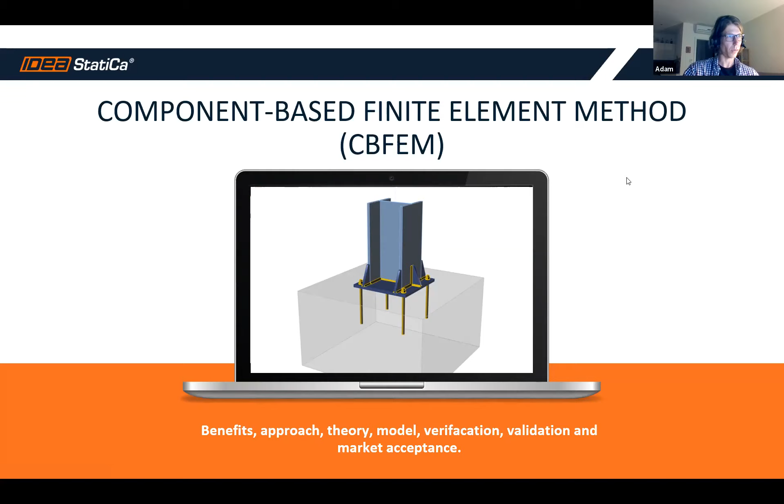What is CBFEM? This is a very unique, innovative technology, a component-based finite element method. That's the full name of that. And what it does, it allows a design and code check of steel connections according to codes and national standards. And the advantage of this technology is that it can do any topology, any loading, and it can do it pretty fast. And it supports various codes at the same time.

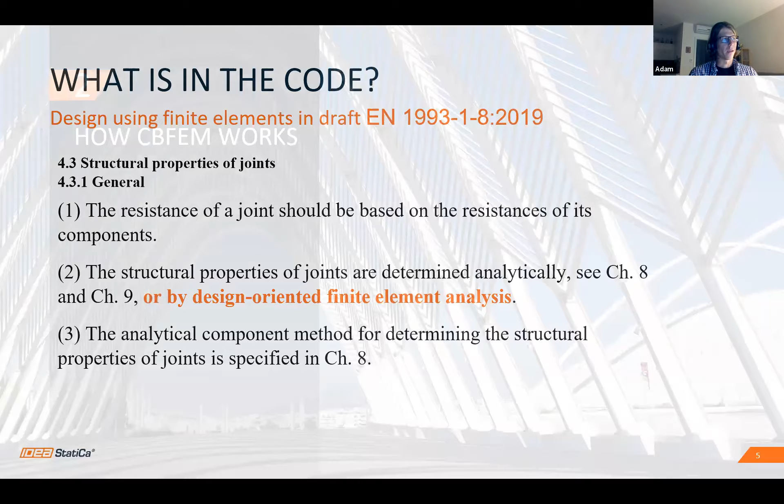Now, how does it work? What's behind this? This is something a bit different from the standard finite element analysis softwares, like ANSYS or Abaqus. Those programs are pretty good in simulating the real behavior, like deformation behavior of connections or steel structures. But for code checking, this is not really of any use, because you have to take into account all these code-defined safety margins and safety factors and so on. So that's why this is a bit different approach. It uses the design-oriented finite element analysis, which takes into account all the code requirements, and this is included in the method.

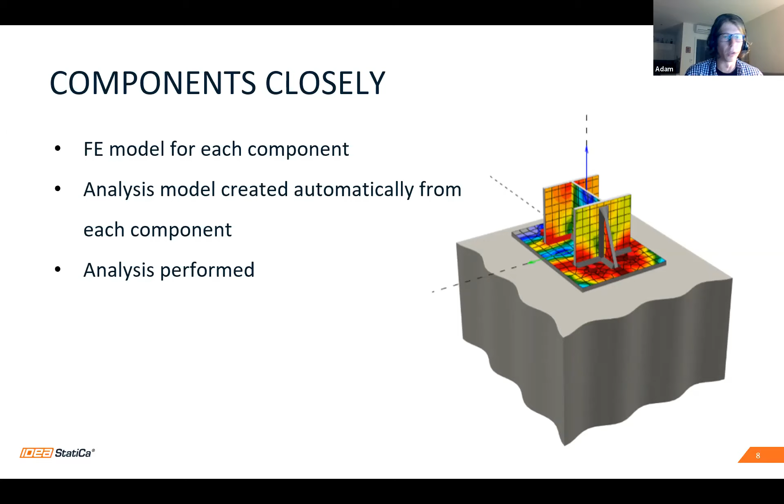Now, it works, as I said, based on finite elements. So imagine having, for example, anchoring of a column. This is all separated into finite element components, and there is the analysis model created automatically by the software, and the analysis is performed. You will see this all live, I'll be showing you in a couple of minutes.

How is the model of, for example, an anchoring or a steel joint created? There you have plates, such as end plate, fin plate, or whatever — that's a 2D shell element. You've got the 2D finite elements. Then members such as columns and beams, for example the I section or whatever, those are shell elements connected by butt welds.

Then you've got bolts and anchors. Those are kind of non-linear springs. And the weld elements are just linear special finite elements with constraints connecting the shells of the plates.

The steel material within the model is described as plastic nonlinear in way of the material, not in the geometry, but partly we also cover this nonlinear behavior of thin-walled or closed cross sections and so on. So this is partly also covered. And the material model is, as I said, design oriented, taking into account all the safety factors.

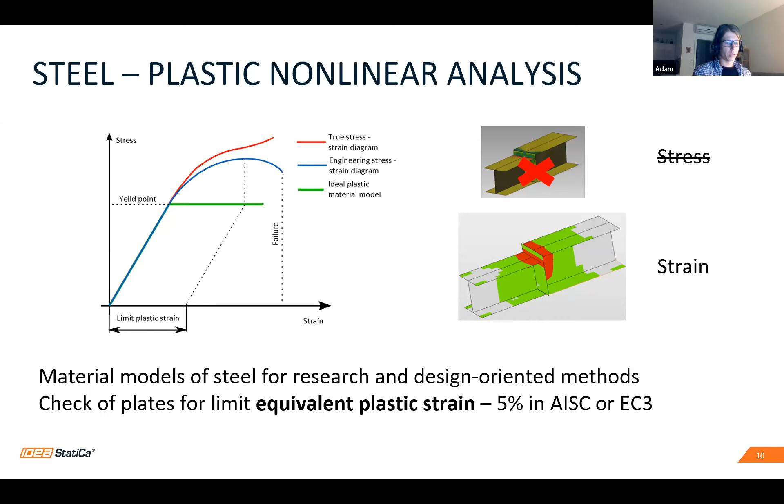Now about the welds, they have their own finite elements. They respect the geometry, of course, also stiffness and ductility of the real weld. And what's more, one of the highlights of the method and the software is that we offer redistribution of the stress along the weld.

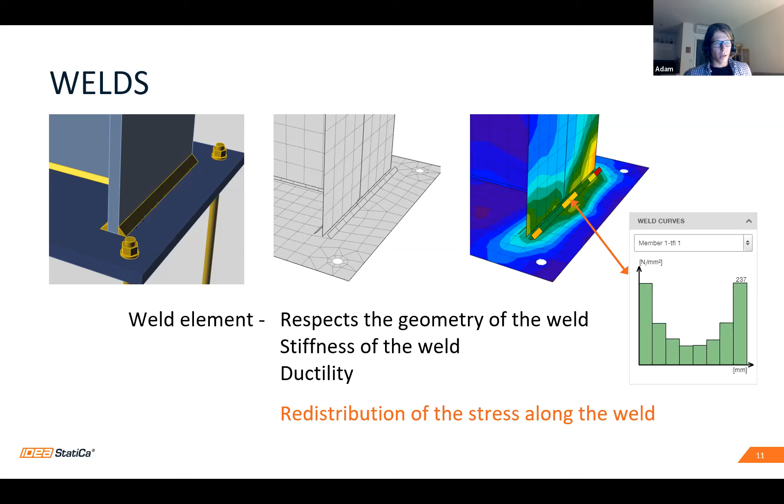What does it mean? That was made about 2 years ago, an upgrade of, I think, version 8 of IDEA StatiCa. We were thinking about how to improve, how to match better the real behavior of welds, because if you assume elastic or just plastic behavior of a weld, then the real capacity is much higher. So we were thinking how to boost that, and came up with this plastic redistribution.

That basically means that when you have a weld — for example, there you have an image of an I section on a base plate, and there's a fillet weld along one of the flanges — now you start loading and increasing the load of a moment, started at 50 kilonewton meters in this case. What's happening is that in these finite elements, there are 9 used to model the weld, and you're getting the high stresses at the edges of the weld.

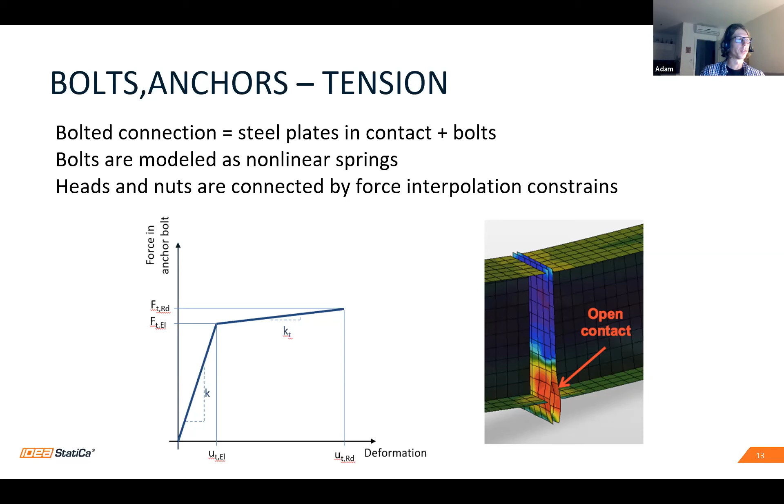There's elastoplastic behavior of the bolts and anchors, of course. And regarding shear, again that's nonlinear spring contacts around the hole, around the opening for the bolts. Those work only on the side where the bolts press or apply tension on the plate opening.

And this has been patented. That was a big success because we've also got a US patent for this, and that pretty much covers the solution and the whole method.

Another part of the model is the concrete block. That's of course the compression-only element, works as a Winkler-Pasternak subsoil, and that represents, basically like small springs, the deformation of the concrete block on which lies the base plate.

The tension is of course carried by the anchor bolts. Then you've got the shear force, which is either transferred by shear of anchors, or by bending the anchors, or by friction along the surface between the base plate and the concrete. Also, we can model a shear lug or shear key.

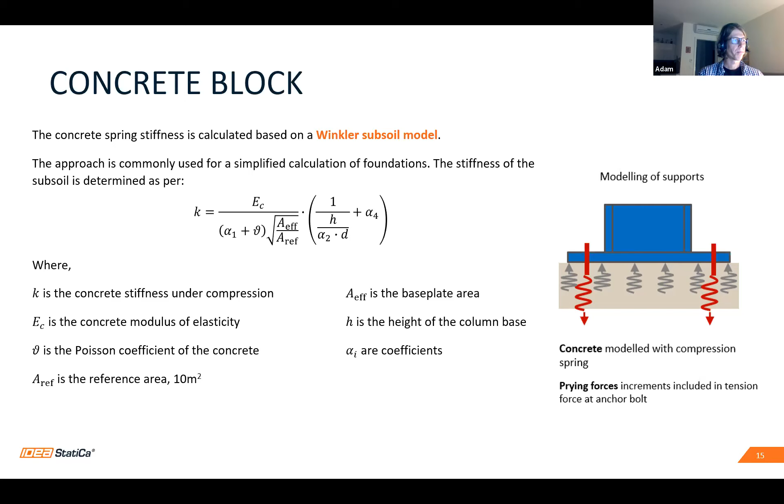Okay, so those are all the parts. And with those, you assemble the analysis model. This is, as I mentioned, created or generated automatically by the software or by the method. And the model is meshed - there's of course a meshing engine inside.

This is also a bit different from probably the software that you know. It's special in that there's no intersection or match needed between each element. You're probably used to finite elements where you have to match all the nodes and edges when connecting plates or separate elements, right? This doesn't need to happen here within the component-based finite element method.

So this is very special. Instead of using that common method, we use a kind of interpolation constraints to match or connect those parts together to make it work. You can see it here in detail. This would probably not work in, I don't know, Midas, for example, or other common finite element softwares.

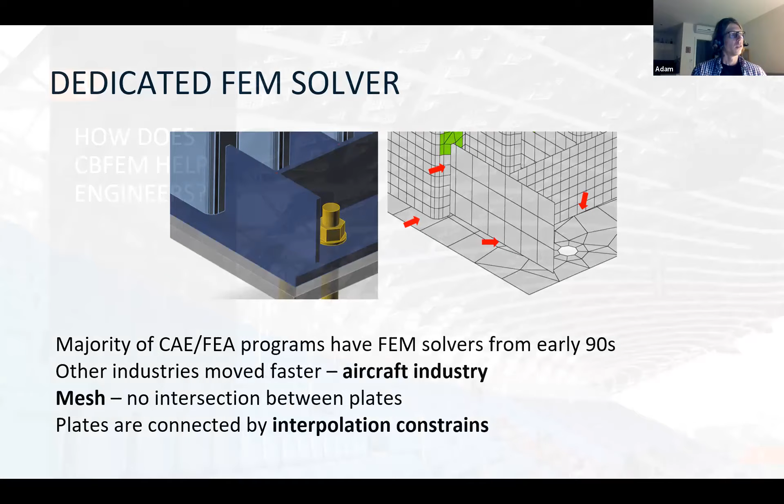Okay, so that's a bit about what's behind or inside the CBFEM. How can it help our engineering society? The method, as it is, covers a couple of softwares today. It was originally developed for IDEA StatiCa software, but it's already been adopted for some years by Hilti, for example, for their advanced Profis software for designing and code-checking their anchoring.

So they are using this technology there. Also, Advance Design Connection, that's actually just a twin of IDEA StatiCa under the Graitec company. And also voestalpine Profilform - they have their special software for designing and code-checking their special thin-walled constructions. They use it for their own production and designing.

And why is it so unique? If I would sum this up, what I was talking about, it's a general and robust method based on finite elements that allows design of steel connections and anchoring without any limits at all - well, almost at all, regarding topology, design, and loading.

Of course, the first question the engineer would ask himself regarding such an interesting new tool: is it safe? Can I use it? Is it verified? Can I trust it? Because it's something completely new, something that hasn't existed before and nobody else uses. Of course, the answer is yes, because it was very well verified and validated, and it's been a couple of years already - I think it's 8 years since we started with this.

The verification went on in, let's say, 3 or 4 steps. First, the technology and software were developed and created, and then the first step was to verify all the standard connections that are very well described and analyzed in design guides and codes, those repeating ones.

That's what we did with 100% match. Then we carried on, and the second trial was to match complex models created in ANSYS. You spend days or weeks creating those research models, and compare them with this light and easy to use method within IDEA StatiCa. Again, very good match. So we passed this trial as well.

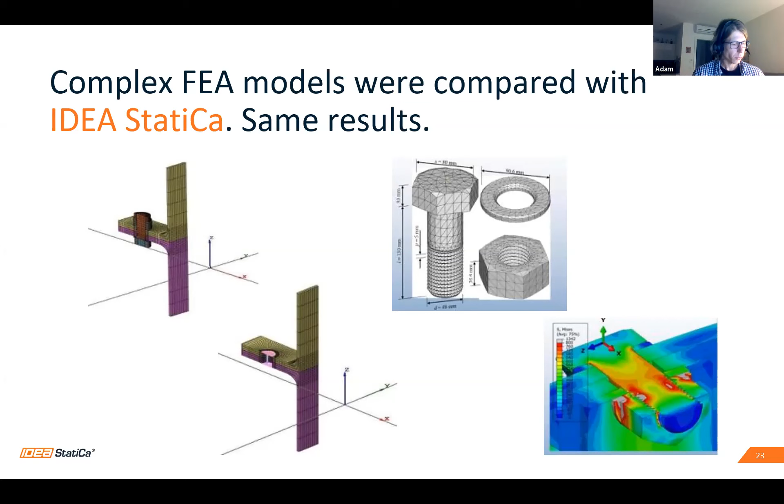This book is available as well if you're interested. It's all described and summarized there. This method is not a black box. It's not the way that we provide the software and say, use this because it's verified and just believe it. It's pretty well covered. There are 2 websites for that.

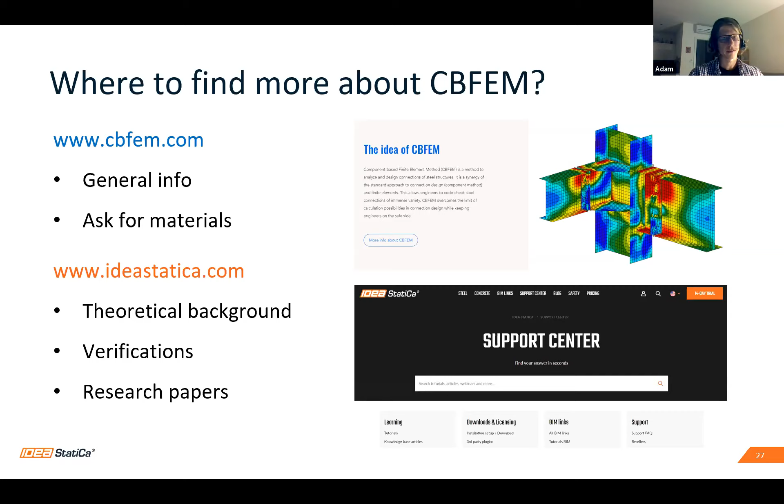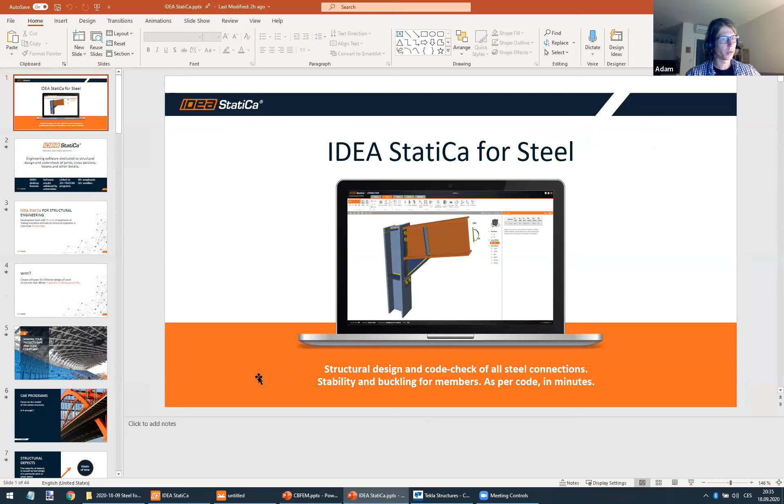So that was about the first part of the method, and now let me move on to the second presentation about the software itself. It's the IDEA StatiCa software. We've got applications or modules for steel and for concrete. I'm not going to talk about concrete today, just about steel. So let's go.

What is it? It's engineering software for structural engineers, for design and code check of joints, cross sections, connections, and details. As I said, more than 4,000 licenses worldwide, meaning a couple of thousand users. The software is validated. We have developed BIM links to more than 20 other software, so you can import data. I'll show you this as well.

We are based in Czech Republic. It's let's say a family business. We've got over 40 people, and a network of resellers worldwide that spread the word. The development is based on 30 years of experience, as I mentioned. The core of the team started 30 years ago, developing finite elements in various applications. Now we are present in more than 70 countries.

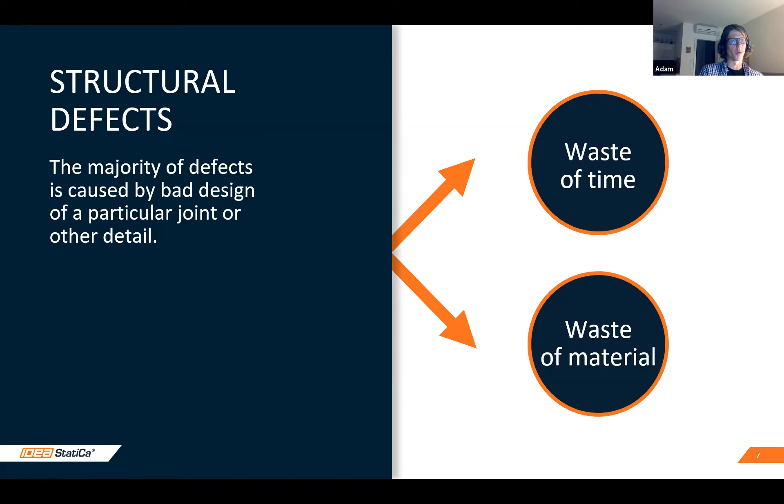If you would analyze defects on steel structures, or even collapses and so on, the fact is that they usually happen in the details, like connections or joints, not in the beams or columns. So that's a pretty interesting issue. And of course, any problem is a waste of time and waste of material and so on. So that's also the motivation why to do this, and why we focus on connections and particular members of steel structures.

And so IDEA StatiCa is the first and still the only one to provide such a tool with this capacity inside and this, let's say, professionalism of the global industry players with this unique method. Now the challenge, of course, always number one, is to be on the safe side, which means comply with design codes: US, Eurocode, Canadian. We support now 8 national standards. We've also got Chinese, Hong Kong, Indian, and a couple more.

And the thing is, when you're a structural engineer you have to code check the whole structure, meaning all the members, the global model, and all the connections and details. Question is, have you really done all of that? 100%. This is the easy answer regarding the standard or the easy connections. If you imagine, let's say, a simple steel hall, standard connections are not a problem. That's like an everyday meal, right?

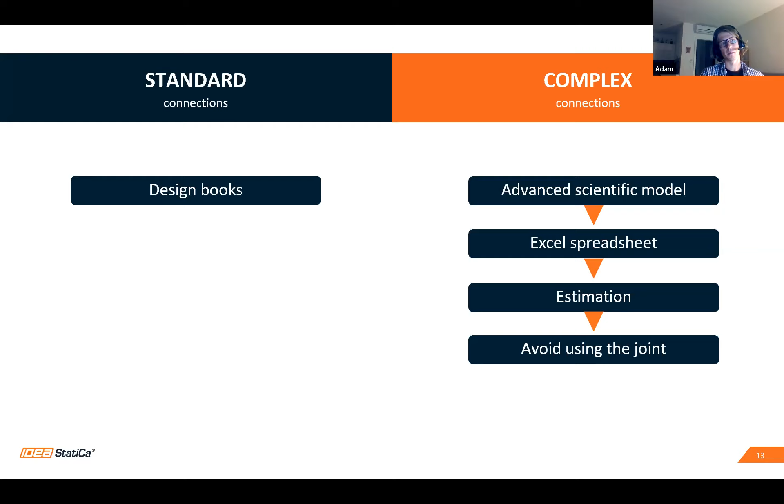So they had to somehow take those outputs and translate or transform them into the forces and the values that you need for code checking. For that, you have to prepare a special Excel sheet that matches just these special details and project. Then sometimes estimate, because that was pretty hard work. And what they confessed, which was very interesting, is that sometimes they even avoided using the joint and had to redesign the detail, spending a couple of weeks of work, right?

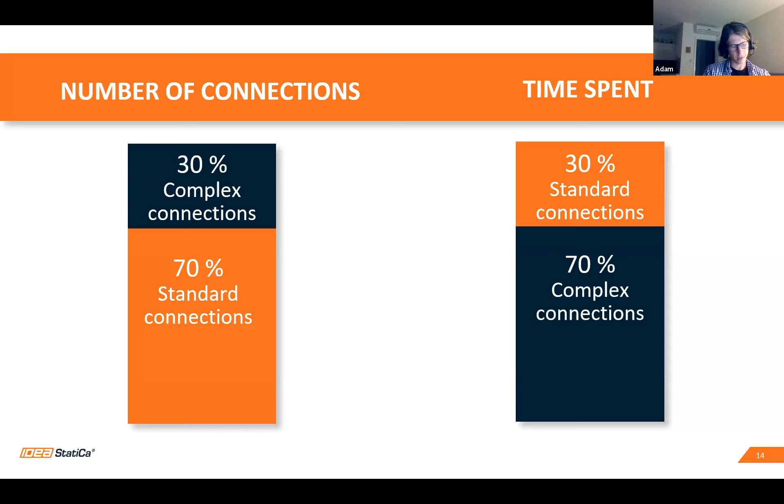And then this is another analysis that we've done. If you take a look at some kind of standard steel structure, the majority of connections are standard, just end plates, fin plates, and so on, and a small number are complex connections. But if you look at it from the side of time consumption, you spend 70% of the time on your project designing and code-checking these complex ones. The standard ones are pretty easy and pretty quick to do, right?

And that's also another motivation why to create the software. We bring a solution for this. We bring a tool to do the job the easy way and pretty fast, actually in minutes or hours, including optimizing and things.

And then we tried to reproduce this with IDEA StatiCa. We found out that in IDEA StatiCa, to model this, you can see it in the webinar, it takes me about 20 minutes or even less to do this from scratch. Of course, I was prepared for that, so I did it the very nice way. But anyway, it's just a simple job to do. And then we focused on optimization. Would it be possible to make the original design better, to improve it?

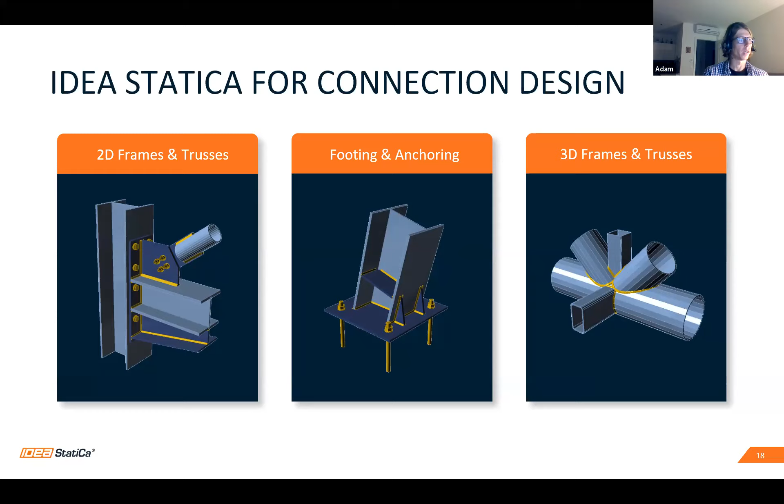And what types of analysis we provide? There's the stress strain analysis, that's the standard one. The code check means you model a joint or connection, analyze, it shows you results and tells you whether you pass the checks or not. That's like the overall check.

Then we also provide buckling analysis that shows you the buckling shapes and critical buckling factors of the connections. Also, you can calculate stiffness of your connection that you can apply back into your global model to somehow improve the efficiency or to match better the behavior of the whole structure.

Then there's capacity design that is used for seismic, and design joint resistance. That's like extra analysis. It shows you how much more capacity you have in your joint when it's designed this way and when you apply this load that you have. So it tells you, I don't know, like 30% more.

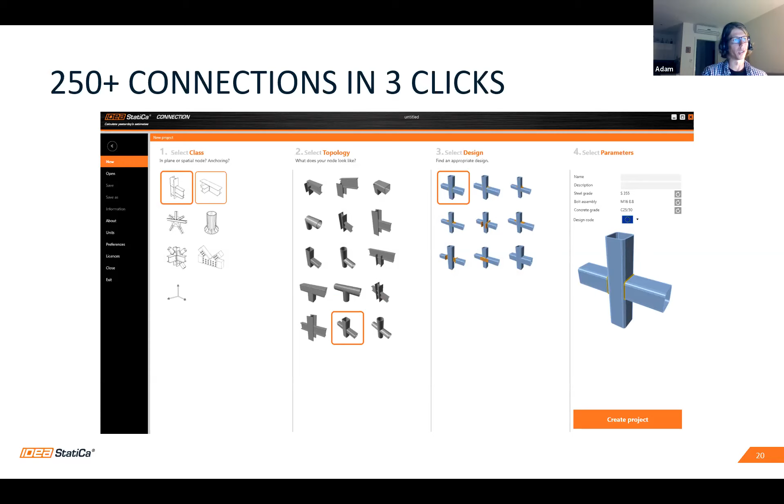Okay, now this software works that there are starting templates, so you don't have to start from scratch with a blank screen, but you can choose some basic shapes, basic connections, and just very quickly edit and modify this and get the results done really in minutes, in a few clicks.

So the workflow: you take any template or a blank screen, you edit it, or just step by step add more members, plates, and items to achieve any topology, any loading in a couple of minutes. There is a nice testimonial from Matthew Pearce, Mott MacDonald, another customer of ours. They are happy using this tool for their complex joints.

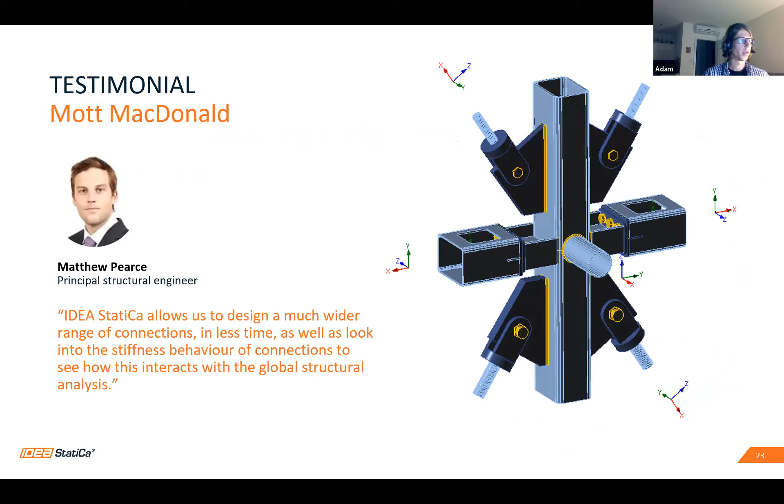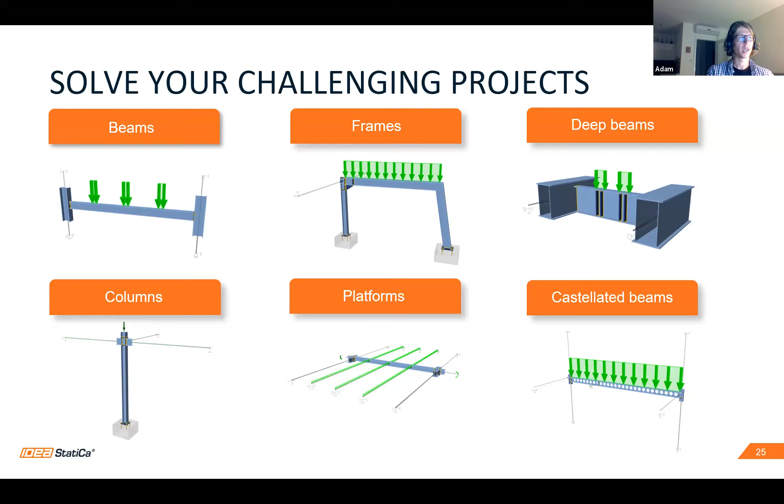What else we have? There was the IDEA StatiCa Connection software, right? Next to this, there's IDEA StatiCa Member. It's quite a new application, and it was developed and is dedicated to solve all kinds of buckling of members of the structural parts. So you've got beams, frames, platforms, columns, whatever, and there you get all kinds of buckling, like torsional, lateral, warping, whatever.

This is treated by a couple of softwares already, but what more we offer is that, of course, there's a stress strain analysis if you model such a beam, for example. A buckling analysis, also nothing that special. But then the third step is that we provide the full nonlinear analysis that includes the imperfections, geometrical nonlinearity, and all the effects of buckling. All this is processed and analyzed, and at the end the output tells you, even considering all of this, whether you have passed the checks or not.

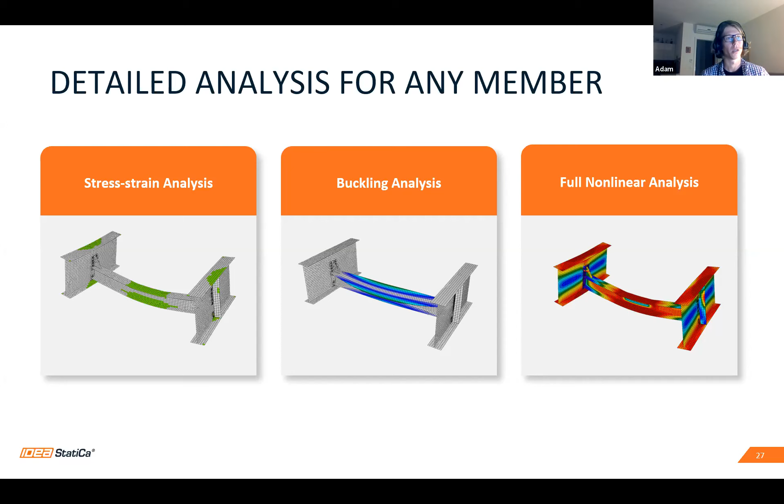So, as far as I know, none of the finite element softwares for structural engineering offers this. And of course, this is again free in terms of topology and loading. Those are some examples on the pictures that can be done. Also, it takes into account the stiffness of the connections that you model, to match the real behavior as best as it can.

Other workflows, this is regarding the BIM links. We are linked to a couple of finite element analysis software. How it works: when you install IDEA StatiCa on your computer, it adds a command to your, I don't know, SAP2000, ETABS. That means you analyze the structure there, just click the command, select a structure node and the connected members, and it transfers the data into the IDEA StatiCa Connection application.

What you have to do is add the design, which is of course not included in the structural software. What you read from there is the topology, the cross sections, and the main thing, all the loadings.

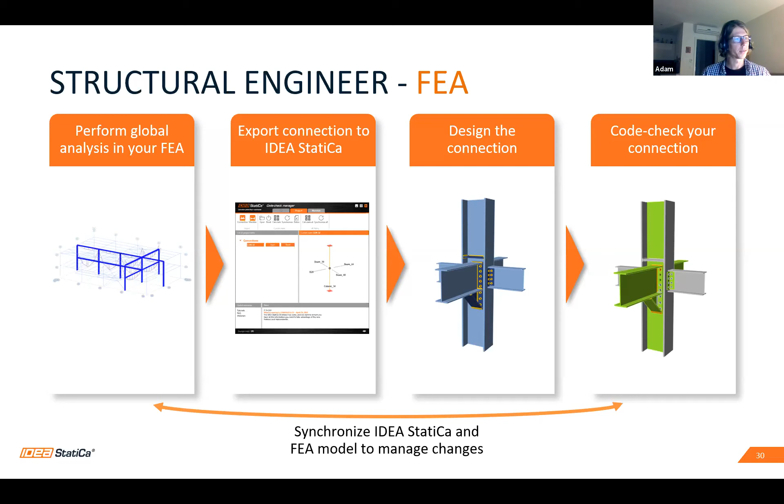Next to this is the import from CAD software such as Tekla, Advance Steel, Revit. There it's a bit different, of course, because what you import is the design and not the loads. So what you have to do when it opens in IDEA StatiCa Connection is to add the loads. And the best of those two is that you can combine them.

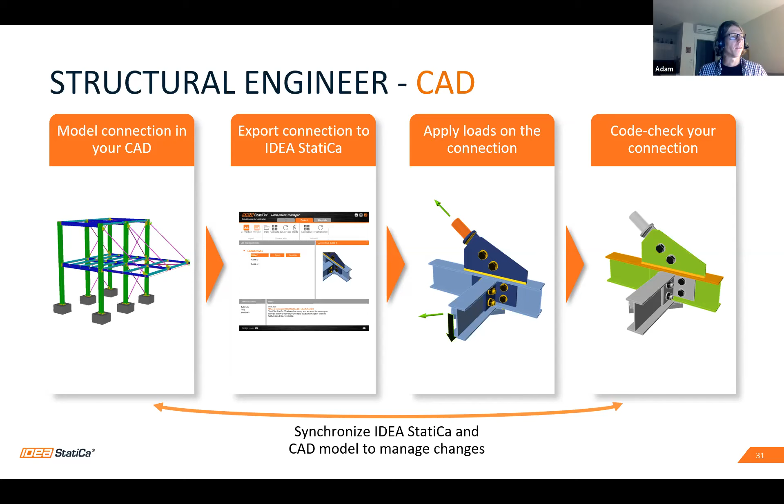If you have a global model of a structure, for example, such as a simple steel hall, you have this in Tekla, you have this in ETABS, and so you import the Tekla model where you have the design, all the plates, bolts, welds, and so on. And from the other side, you import the same joint, the same node from ETABS, and they meet up in IDEA StatiCa Connection, and you can have your coffee instead of typing and preparing the model to be analyzed.

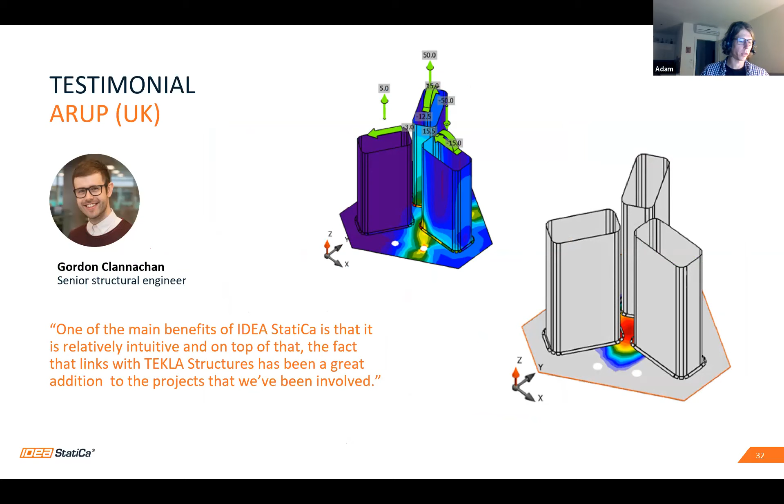Another testimonial from Arup from UK that they appreciate the BIM links, how they helped their workflows and saved the working time, and so on.

One thing to mention, we are not alone, of course, in the industry. We are talking to all the other companies, players, all the people, and we are in quite good relations with them. We are actually their partners. We have partnerships with those major producers of software, and so we cooperate developing the BIM links.

The thing is, next to that, what I'm trying to tell you, we offer a great solution, great software, a great tool that nobody else has, which is all just fine, but the other part of the business, to make it work, and that we also focus on a lot, is the technical support that we provide. This is being done by me and my teammates.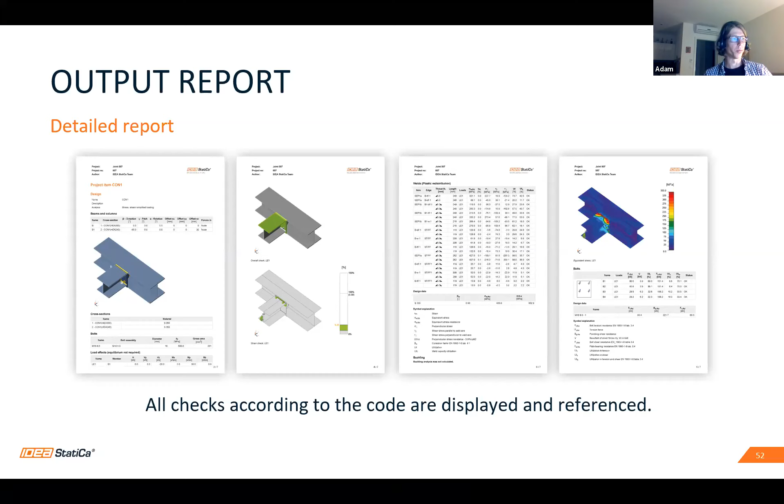This is how the report looks. It covers nothing special. It just covers all the things that you would guess should be there. Everything is displayed.

And almost at the end of this presentation, just to mention, we release two major releases each year, in autumn and in spring. There we release new functionalities, new features, improvements. And if I still haven't convinced you about the potential and the greatness of the software, just try it yourself.

Based on the experience, we can say that almost all the customers or people that tried the software understood the potential and the power of the tool. And it's pretty simple to use, that's another big advantage. You don't really have to spend hours of training, workshops and courses for that. You just start with a tutorial on your own, and it's very easy. I'll show you in a minute.

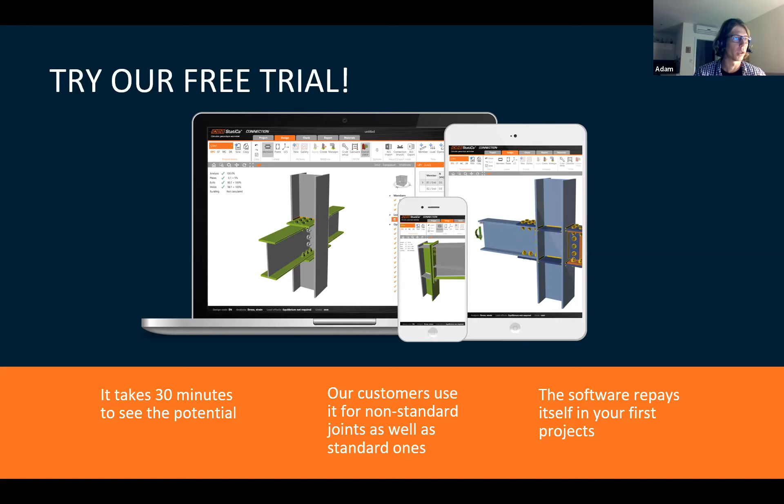So that was it. That was the presentation part. Now, let me show you how the software looks like. So if I go to this is the starting application. Here you can select each of the applications. So connection, you start in here. This is opening for like a couple of seconds. I have opened one window here in advance.

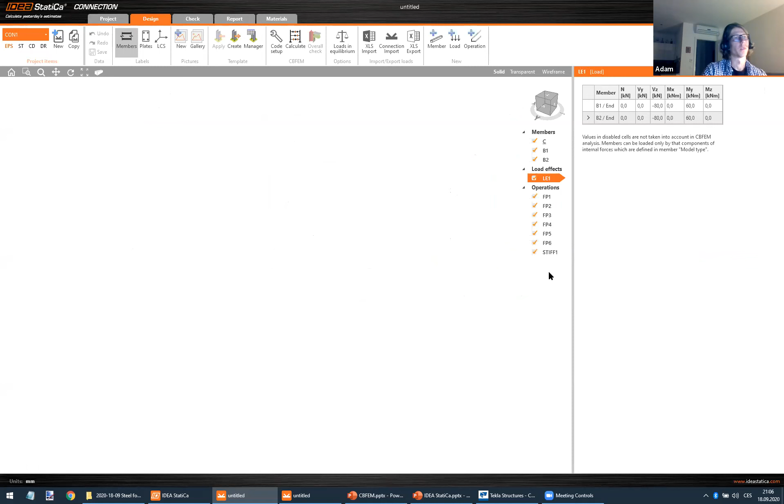And so this works like this, that you select here the code, some kind of starting information. There you have the template. So you can just select any of those. So, for example, we'll take this one. And now the software creates the model. Right, this is prepared. Now you've got a 3D window here where you can control the visual, and you can select anything in here and modify, edit, do whatever you like.

So you've got like 3 main things to do here. You've got the members, the columns and beams. You can control in here. You've got the load effects, that means the nodal internal forces that you input, and then you've got the operations. Those are all the parts on all the connections. And now you can do whatever you like, right?

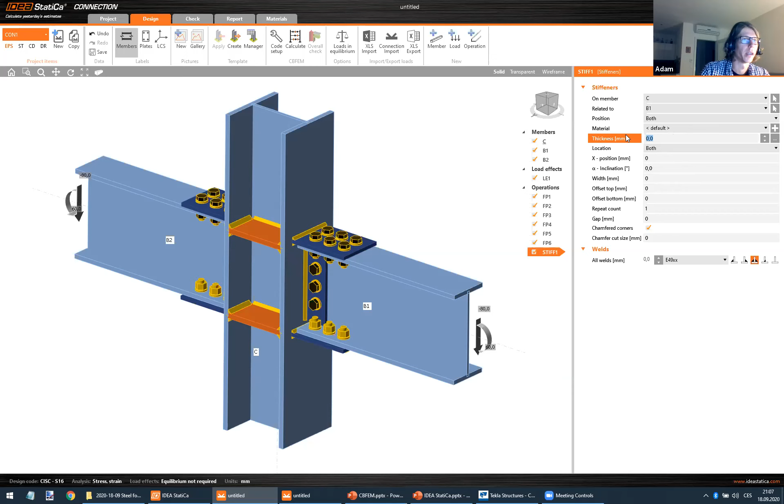So here, I can turn on, turn off the stiffeners. I can modify its thickness. I can change the direction, rotation of those members. You can see the fin plate just matches to the new shape or topology, as well as the stiffeners. You can, of course, change the cross-section.

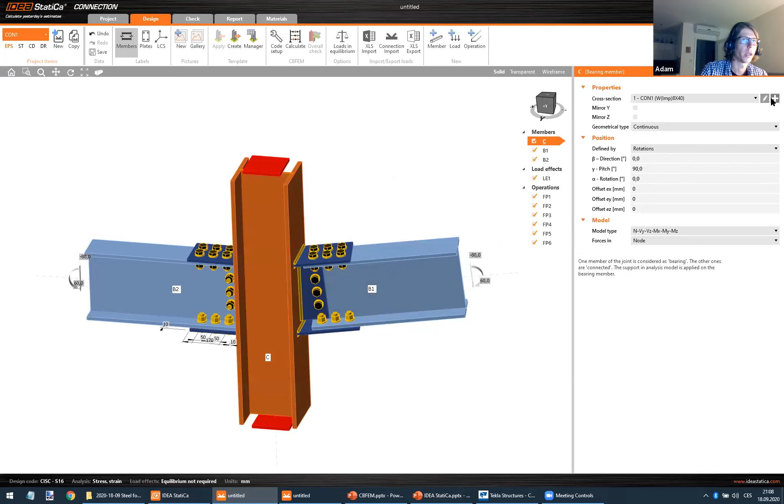So for example, I'll just go ahead and delete the stiffener and say I want a hollow section instead for the column. So you can select here, there's a huge library of cross sections for the rolled ones, for the welded ones, cold formed. There's even a simple timber application as well. And of course, you can create your own cross section. You can also import a cross section from DXF, from CAD.

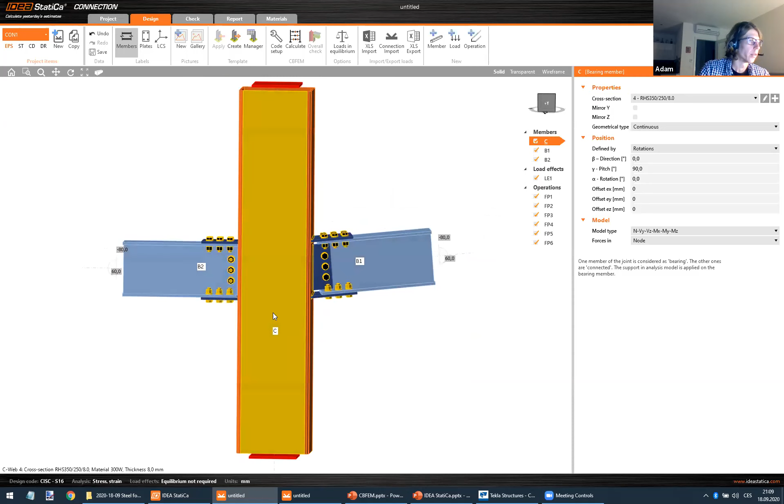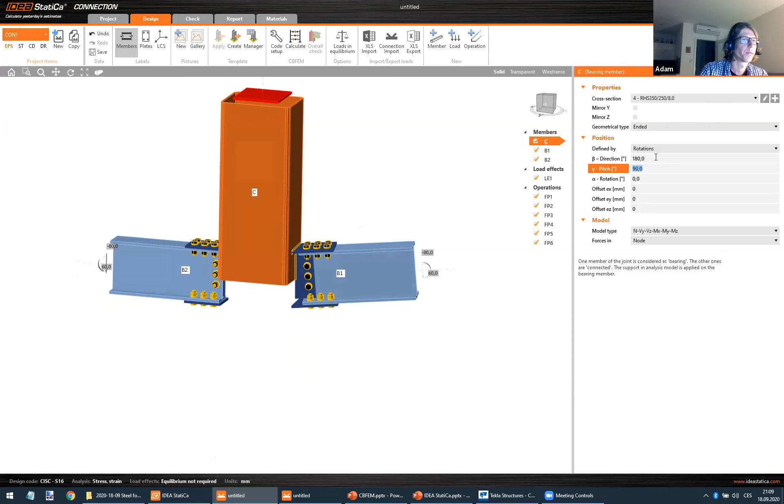So I'll just pick some of the square. You can assign favorites here. So let me pick one. This one, for example. Okay. And you can decide, okay, I'm modeling now say the second floor of the structure, and if I decide this is going to be the roof, I can switch here to ended, rotate this one like this, make it longer by using cut operation, and in such a manner you can have a roof of a column.

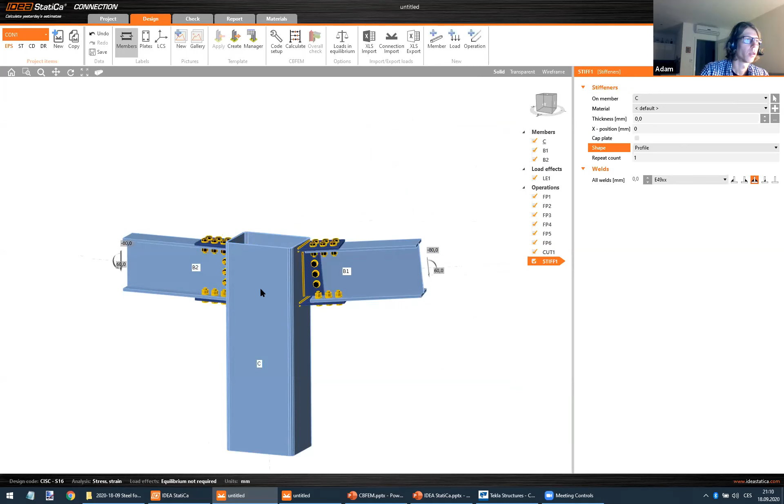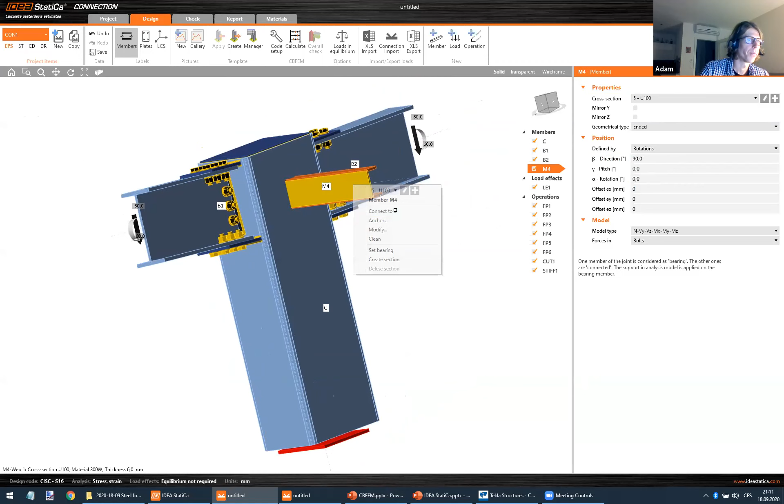You can say this is going to be perpendicular, and create a cap on the top of the column to cover it. And you can add more members in here. Let's say I'm going to add another in here. And using the right click, I can go ahead and select some template. In this case, there is not yet any template suitable for such a connection. It doesn't matter, I can just do it like this.

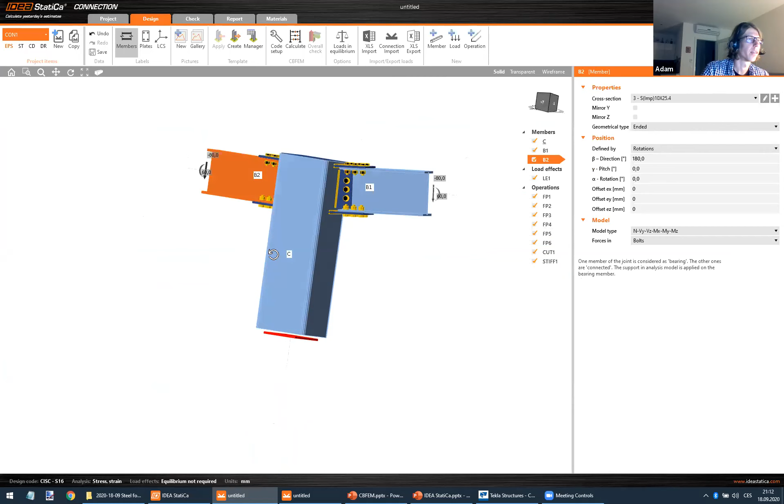For example, modeling a fin plate. Choose this one, connecting to this one, and play with it like this. Make it bigger. Say it's going to be 1 bolt, and like this. I guess you're getting the idea. This is now how you do the job. As I said, you can always optimize.

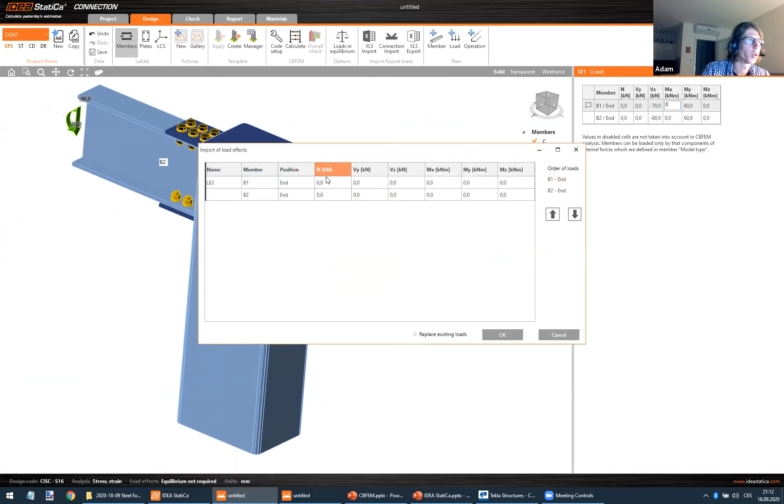If I calculate this now here, this is how you input the forces. You can use an Excel import, so you don't have to type those. Or, as I mentioned, if you use the BIM link, you get all the forces from your structure model. So let me just input something in here and let it calculate, so I can show you the output.

There on the ribbon, there's a couple of icons. There's not much, because the philosophy of the software is to keep it as simple as possible for the user. So you can control here your project items. You can have more within one file, one project. You can have more joints or connections or nodes stored in here.

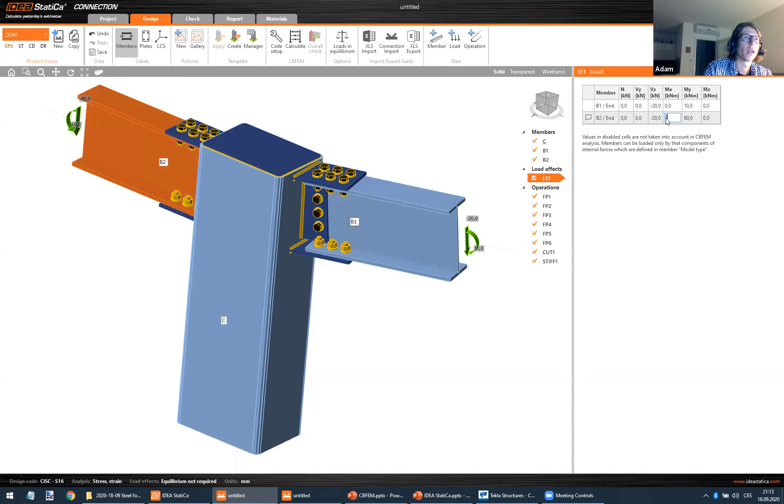Well, this is now overloaded, so I will input lower forces. When it's overloaded, it will still provide you the results, but it takes a longer time to calculate it. Then, of course, you can turn on and off some infos and so on.

Create pictures on the way of your workflow. You can create templates. For example, if you design such a connection, you can create and store the template within your software installation, and then you can use it anytime later again if you have the same topology of any connection. There you have a simple code setup.

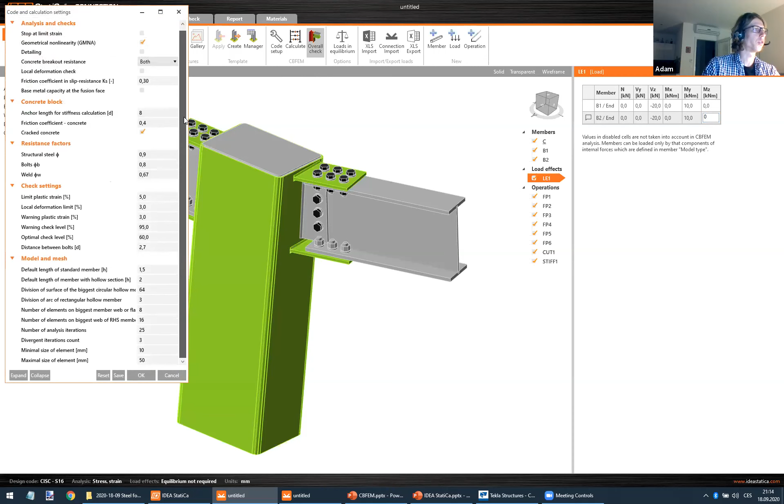This is recommended not to modify, but if you want to experiment, you're free to do so. You can change all parameters of the model and mesh and the safety factors and other things in here. But this is the default settings which was verified, and this is what we recommend to use. Calculate button, and there you have those icons to import the forces, add loads, operations, members, and so on. You can use the right clicks everywhere as well.

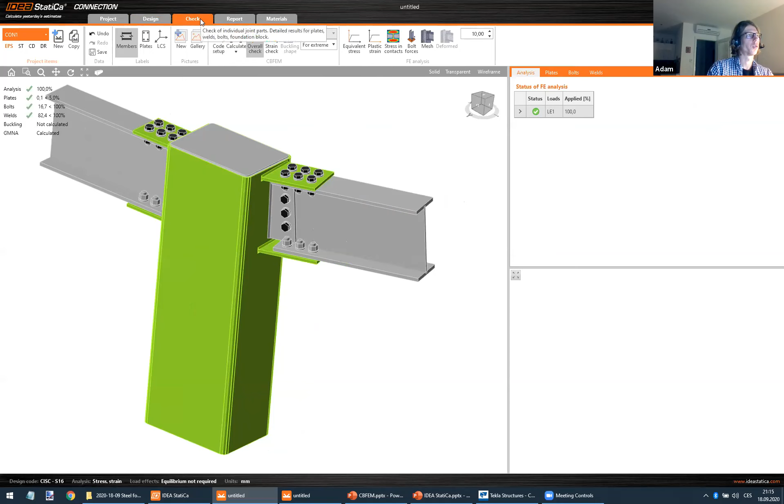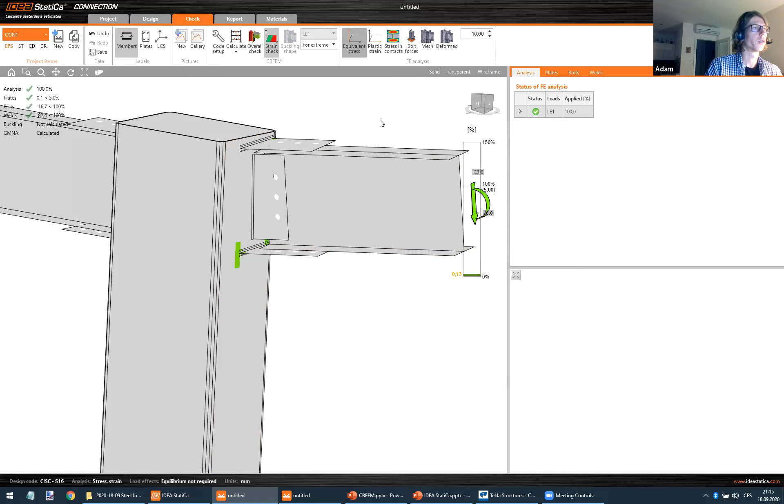So now, since this is calculated, you can go to the check tab, and here you can browse the results, see the strain check, where the strain occurs. This is happening here, the lower flange or the plate in here. You can turn on the equivalent stress, the distribution of stresses on the joint, and turn on the mesh and deformed shape.

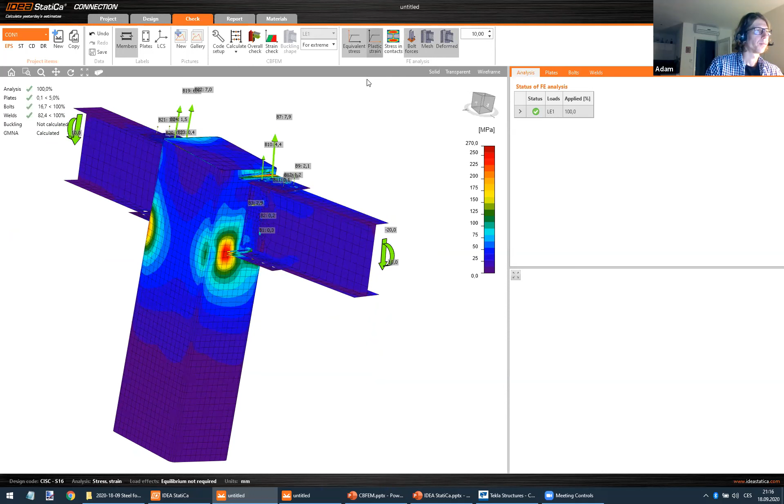This is, let's say, just a simple tool to visualize and control. It doesn't tell you really how much of the deformation you have of each component, because this is not what the software is created for. This is created for code checking details. So where are the code checks? They are stored in here.

For example, if I'm interested in this weld, I can click on that, and here in the right tab I see the overall information, the details of the weld and how it's doing regarding the check. You can see the distribution of the stress along the weld and its position in the model and so on. And you can open here to go through the details.

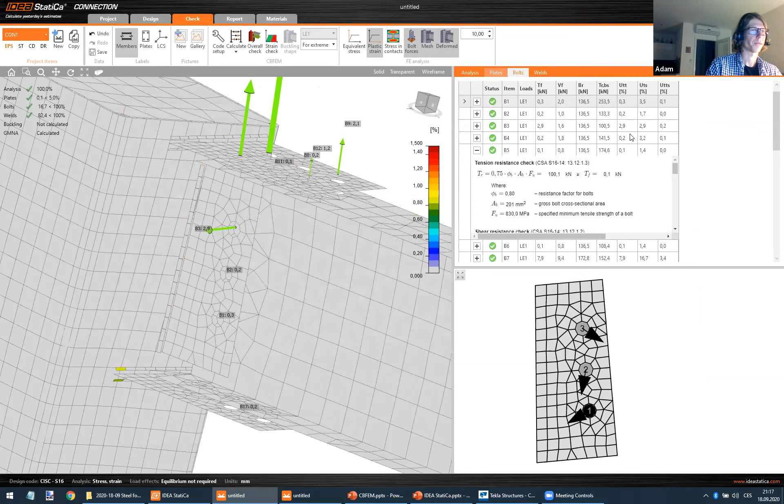So here you see the equation from the code for the weld resistance. All the factors, all the values listed and described. If I go ahead and I'm interested in, for example, bolt, let's see what it tells me. We've got all the code checks listed in here. For plates, this is just simple. It checks the maximum strain on each plate and displays just the simple values.

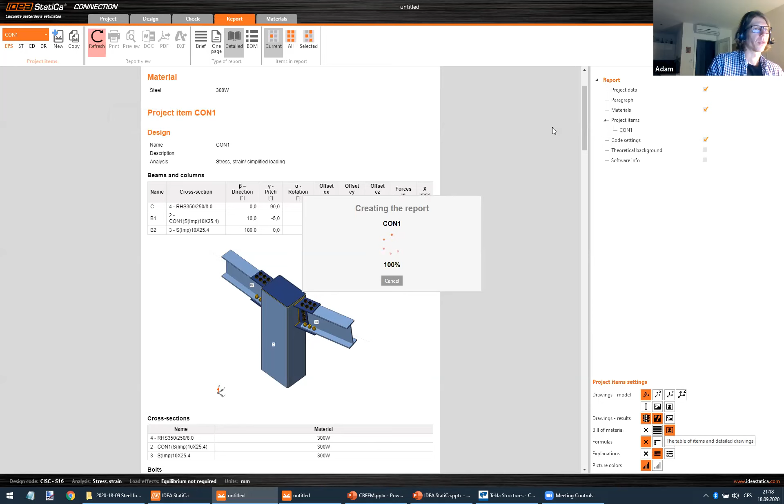Now the report, just briefly, nothing special. To be honest, it's just the report with everything listed. You can play with what you want inside, if you want all the formulas or just part of them, if you want to add pictures, bill of material, which means, if I refresh this, we've got the sketches of the plates for the workshop, for example, and all the checks listed. It looks like this. You can export these reports to DOC and edit it further, or PDF or print out. You can export those drawings or sketches to DXF and so on.

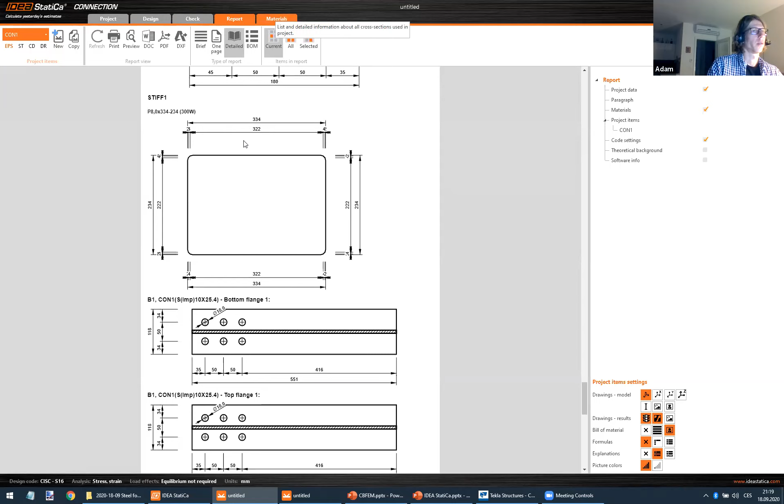And the last tab here is materials. Again, there's a library of the standard steel materials, bolt grades, and bolt assemblies. And you can, of course, modify everything you like. You can add your own material, add your own bolts. If I go back here to design, I didn't mention how the bolt library looks like. This is what you get, of course.

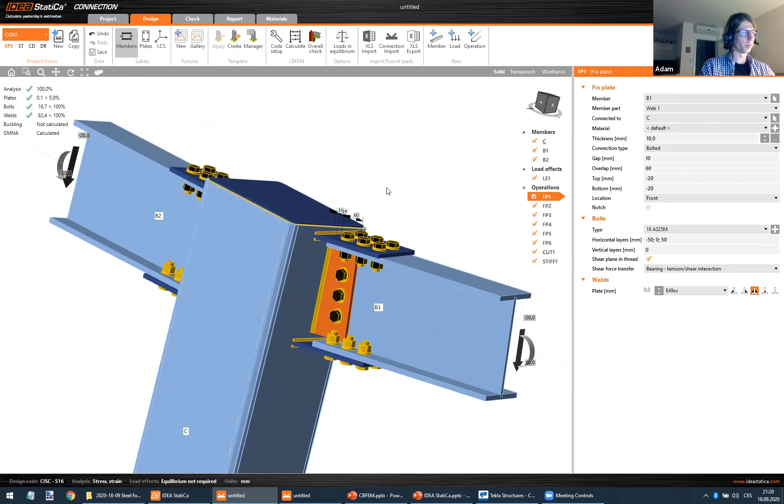And now, since you calculate and analyze, code check such a connection, you can say, okay, this is looking good, and I can do any change I like. You can change thickness of this weld, thickness of those plates, and again, I'll try to reduce the amount. You can do it in here, or I can go to editor and edit these bolts like this and just calculate right away.

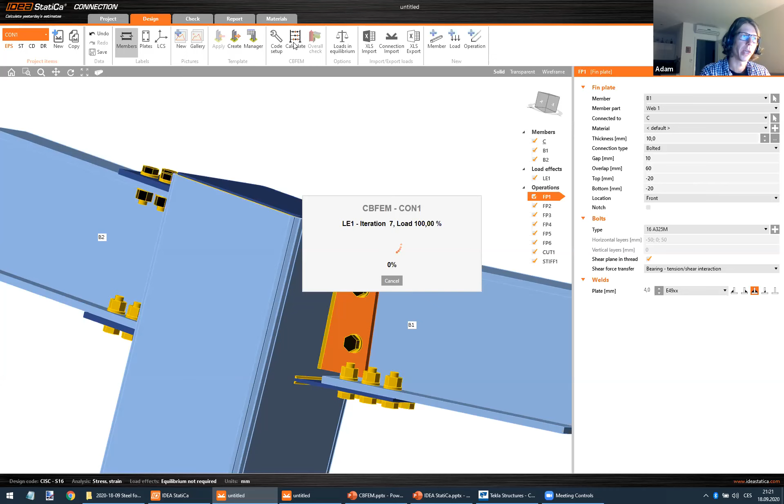Nothing goes wrong with the model. You don't have to be afraid that the model will fall apart, which I remember is happening in some of the softwares when you start to edit a finished model. It just stops working, and this never happens here. This is very open for any editing and so on.

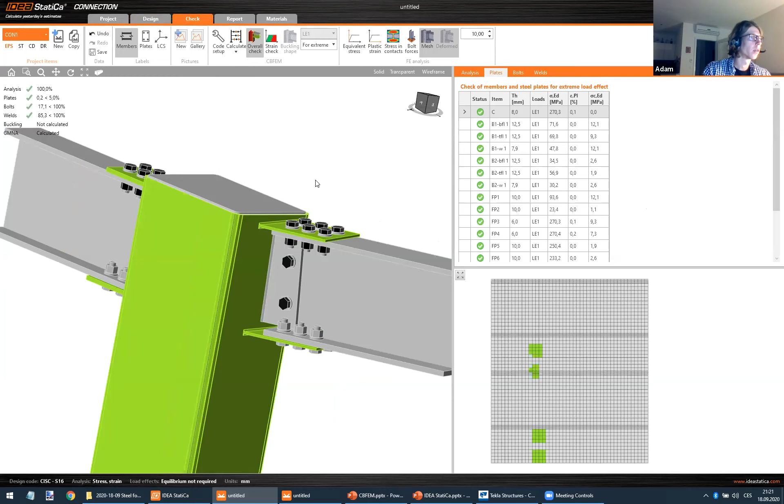I remember my struggling with my final thesis when I was a student. I was modeling a structure with finite elements, and it was always like spending days creating the model, and then if you want to change something, you had to almost start from scratch again. And so nothing like that in here. So that's how it feels,

how it looks like. Let me maybe, I don't know how much time we've got left. I've got first information about something like 1.5 hour, 1 hour. We're still fine. Was there something else you wanted to show?

Well, maybe just 5 more minutes to show you how the BIM links work with Tekla. Just briefly, so you see how it looks.

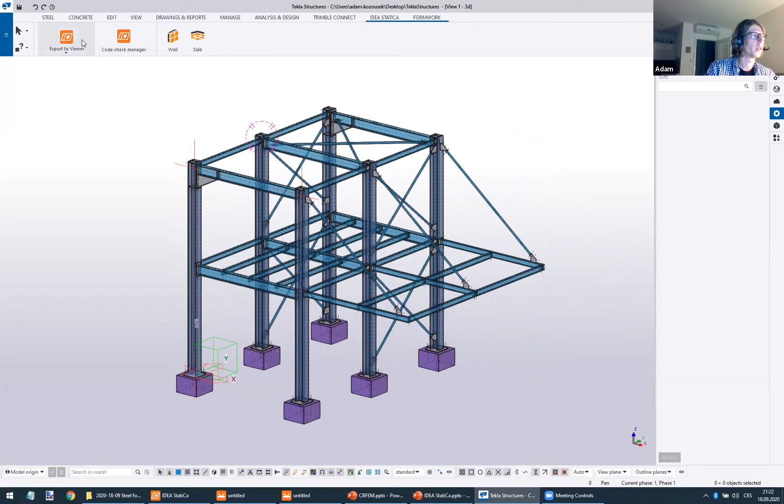So I've got some kind of steel structure in Tekla Structures 2020 version. When you install IDEA StatiCa, it adds ribbon commands into your Tekla: Code Check Manager, and Export to Viewer. This is an online application that, as a designer, you can export to, a free browser application where you can share the design with anybody who's interested, for example, this connection. And then if you want to analyze the detail, you open this Code Check Manager.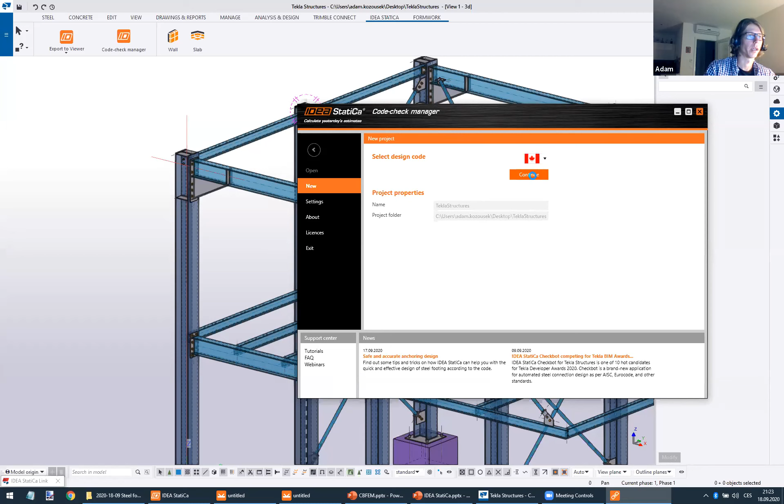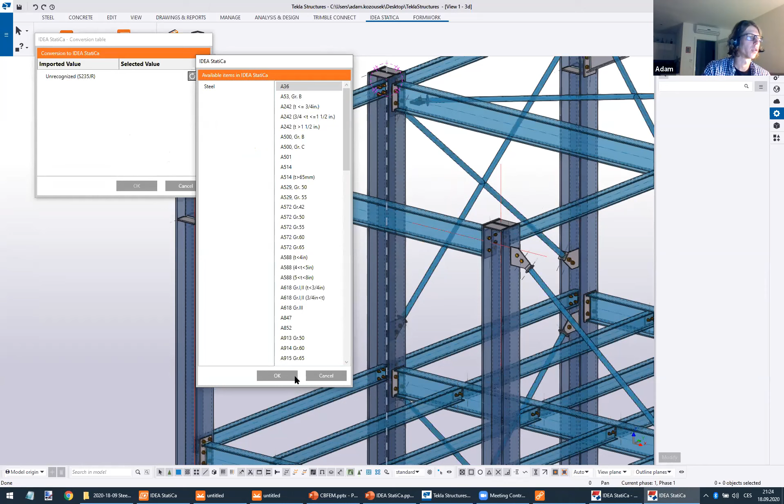That's the tool that brings the data from Tekla to IDEA StatiCa. Again, select the code - we've got a couple of flags in here already, so I'll go for the Canadian one. This happens when you start a new export from a new project. Here you say I want a connection, find the structure node or intersection point, select the beams, select the parts of connection. Here it asks you to recognize the steel or translate - this project is in Tekla in Eurocode, with European materials, but you can translate or transfer them into US or Canadian material models or grades. So that's now being done.

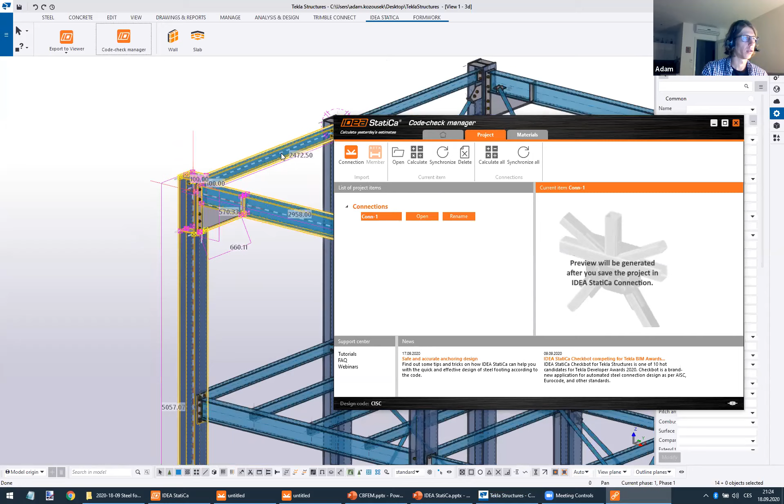In the manager, you can of course export more nodes, and selecting one highlights the one that is selected. Here you can do a couple of things, like open the node, and you can also directly calculate if you previously opened and input some forces in the model. Synchronize means if you change anything in Tekla, you just click synchronize and it uploads or updates your model in IDEA StatiCa without deleting the load effects.

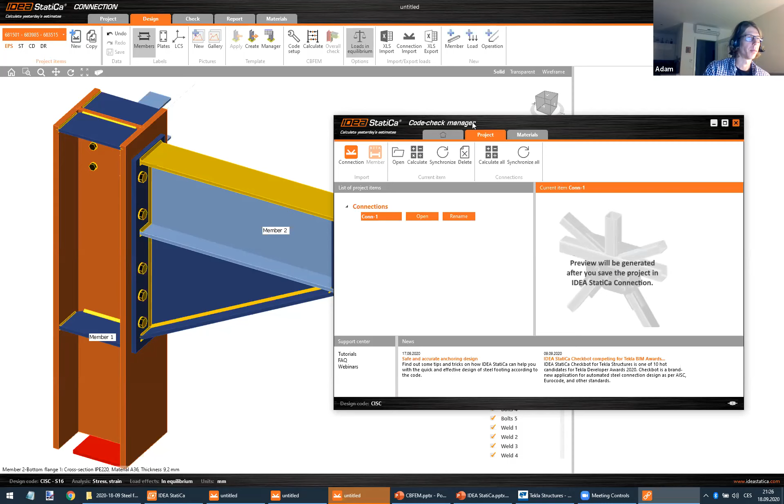So if you've got, for example, 20 connections exported here listed, and you've already input all the load effects and calculated all of them, then you went back during the design process to Tekla and modified thicknesses of plates, positions of bolts, stiffeners, or whatever - you just click synchronize all, it uploads and updates all the data in all your 20 connections, and click calculate all, and it shows you if you pass the code checks even with this new modified design. So you don't have to go one by one and repeat. Another really great time saver.

So here I am - here I got this from Tekla, all plates, bolts, welds in there. What I have to do is input the load effects. So I can click, for example, here to add a load effect, and I'll just input something, I don't care. And that's it, and you calculate this right away.

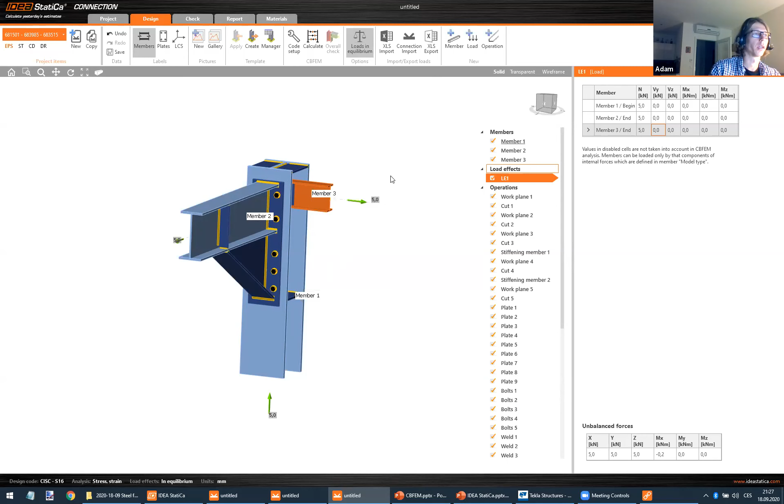As I mentioned, you can merge a similar imported model that you get from your structural software. For this, you use this command, connection import, find the file of the import from ETABS, for example, and it would add here, like, 20 combinations that would match this model, and just calculate, wait for 5-10 minutes to analyze all of them, and see the results.

Yeah, that's pretty much it. If I close this, you've got the information stored, the overview in here.

And maybe the last thing - that's the web page, ideastatica.com. All information you want, trial in here.

Sorry if you hear a strange sound, that's my dog - my thirsty dog, because I'm sitting at home.

In the support center, I want to show you - if you want to start using, just go in here. Here you've got the theoretical background and verification articles. If you're interested how the weld model is created and validated, go ahead and read all of them, or just pick a tutorial - for example, the one I was talking about, combining Tekla and SAP2000. It's all described step by step here, or you can just start with an easy one.

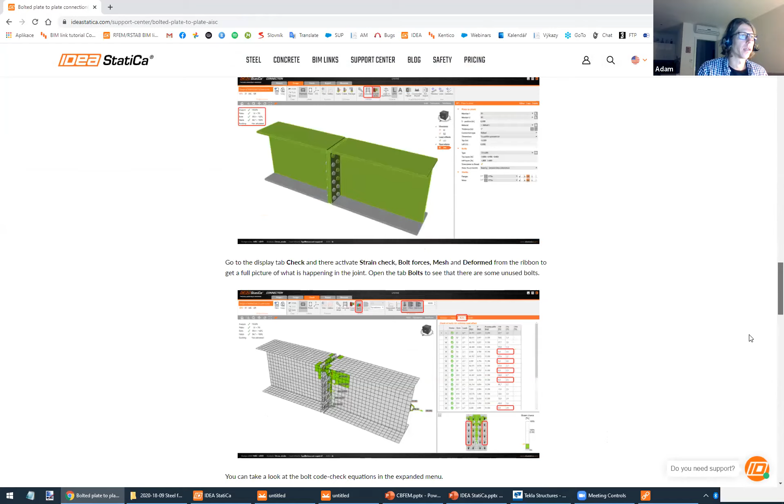When I was going through the training, I found the campus, your IDEA StatiCa campus. Oh yes, I would forget about that - thanks for mentioning it. We provide a couple of tutorials, simply step by step, so you follow along and very easily get the job done. It's an online training course.

This is for anybody interested in learning or becoming a professional designer of steel connections in IDEA StatiCa connection software.

It's an online course. It covers pretty much everything from the very beginning, like how to handle the software, how to do things, and then it goes into all the topics regarding design and code checks. There you've got videos, materials, tests. There's, I think, like 11 lectures. At the end, when you finish, you've got a certificate, a nice thing to show to your potential employers, and yeah, that's it.

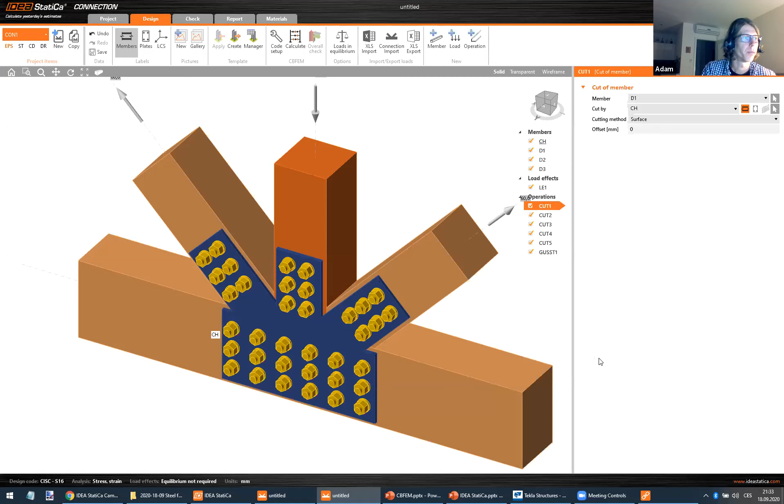Interaction, yeah. Well, regarding the timber, I can show you this right away how it looks like. To be honest, we're at the beginning with timber. We've developed, let's say, the basics of that. You can model these timber sections or timber members and connect them with gusset plates and bolts. And what it tells you, I can show you right away. I think this would be quick.

We focus for now pretty much on the steel part. So of course you check the plates, and for the bolts that you asked about, for now we're getting feedback because timber is new from version 20, so it's like a half a year new feature. We're gathering feedback on this, and according to this we're going to develop more. So for now it's very simple like this: you just read the shear forces of each bolt, and they are not really code checked for now. So this is still limited.

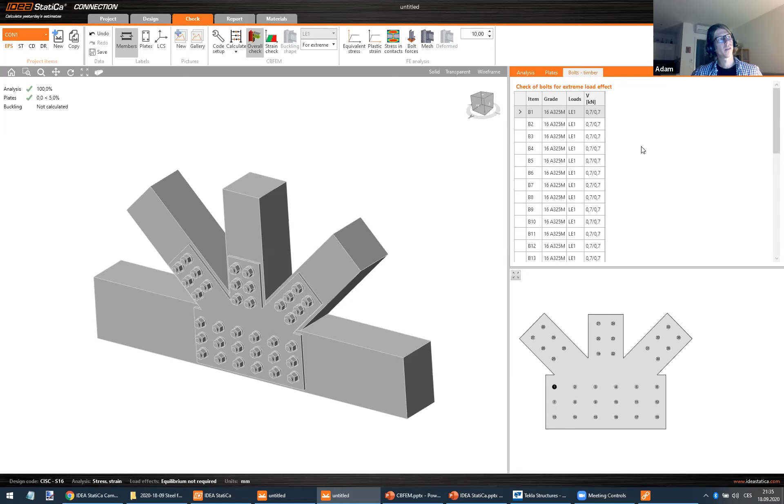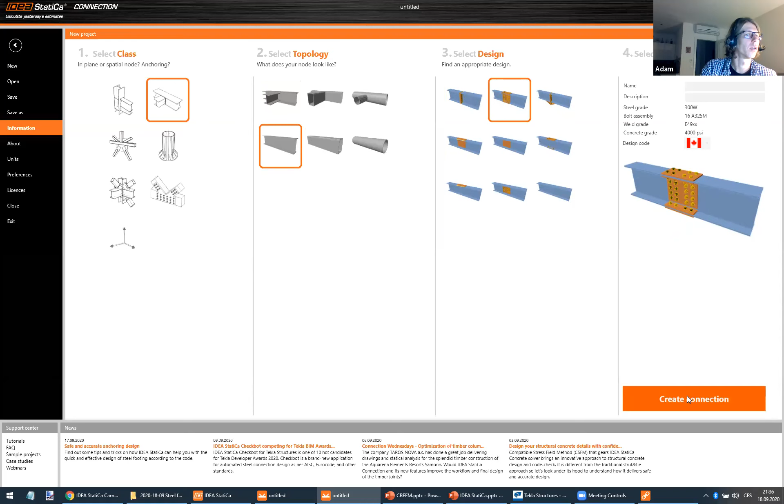Okay, well, maybe let's set up something like that. Let's just pick some example and apply shear - could it be such an example? Do you think this would work? Sure, maybe with some more bolts. It was the distribution of force among the different bolts, comparing the shear in the bolt check and the bolt bearing check. In one case they were not distributed equally, and in the other case they were, so I just wondered how bearing is treated in that way.

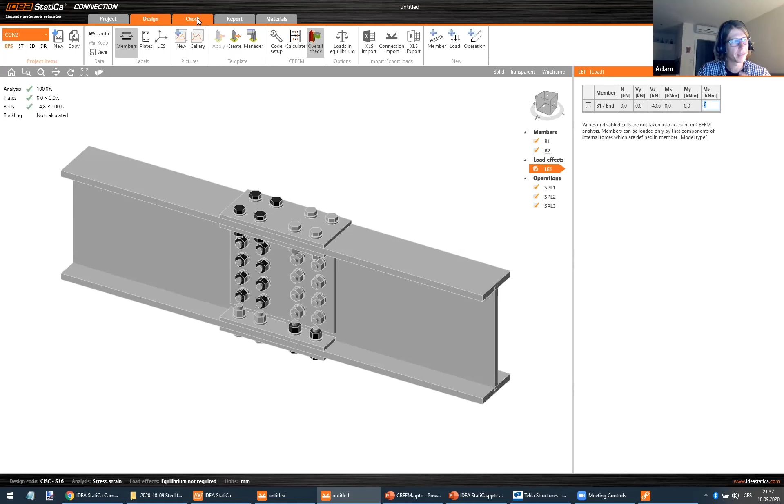Well, that's a good question. First of all, it's different from the analytical model, right? Because in the analytical model you've got the distribution spread equally, or according to some procedure. Here, the force in each bolt is calculated separately based on the stresses generated in the plates and in those members. If I take a look, for example, at the bolt forces, in this picture you can see the stress in the plates, and also the directions of the forces in each bolt and their magnitudes. So yeah, this is a good example.

So under BR, they're all identical, there's not any variation at all. So is there some assumption that enforces that, or does it do something to make the bearing... Oh, that's the bearing resistance. Where's the bearing force? Okay, here it shows you the calculated tension force in each bolt and the shear force in the shear plane.

Okay, and then it's compared to the bearing resistance I see, calculated based on the code. Okay, and the thing is that, yeah, it's...

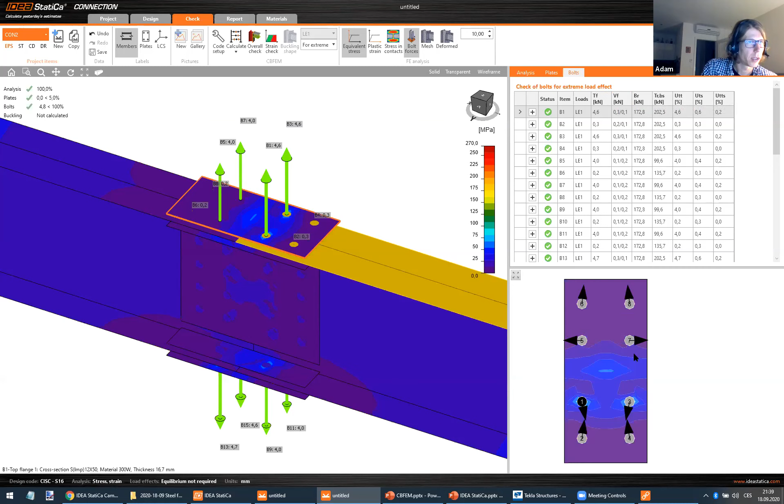For each bolt it's a bit non-uniform, because it respects the behavior of the joint. So if I take a look at the deformed shape and multiply the visualization, here you can see all these bendings and deformation movement. So it's not equal, right? And this is respected, and those are actually, as I mentioned, those prying forces.

If you take a simple example of a fin plate, and you apply tension on the beam connected to a column with a fin plate, you may end up with much higher forces in the bolts than you would calculate with the analytical model or approach. And this is because this CBFEM model respects the deformation behavior and adds these extra prying forces that are applied as well.

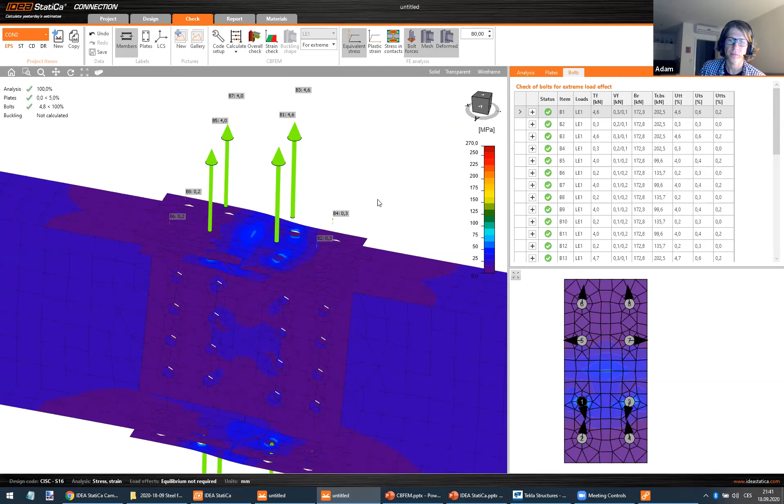I think I'm kind of biased when I say that I've used it. Okay, yeah, we know Ron has used it. And I think I can say that probably there are a lot of engineers who are not aware of it. However, I think that it does have unique capabilities.

So I think it's definitely worth having a look. And that's one of the reasons why we're doing it at the Steel Centre, is to see how that could fit in with some of the other work that we're doing in generative design.

I can't really comment on the engineering side of it, as I'm not an engineer, but as a huge fan of 3D modeling, I absolutely love the modeling engine they built for building these components. I really like that I can go from Tekla Structures and bring a connection in, because I can model a connection in Tekla crazy fast, which is really nice. The templates and the ability to build your own template connections and components inside of it to reuse later on, and just how simple it is to build connections, I really like that side of it. I can't speak to the engineering side, don't know a whole lot about that, but the modeling side is really nice to use.

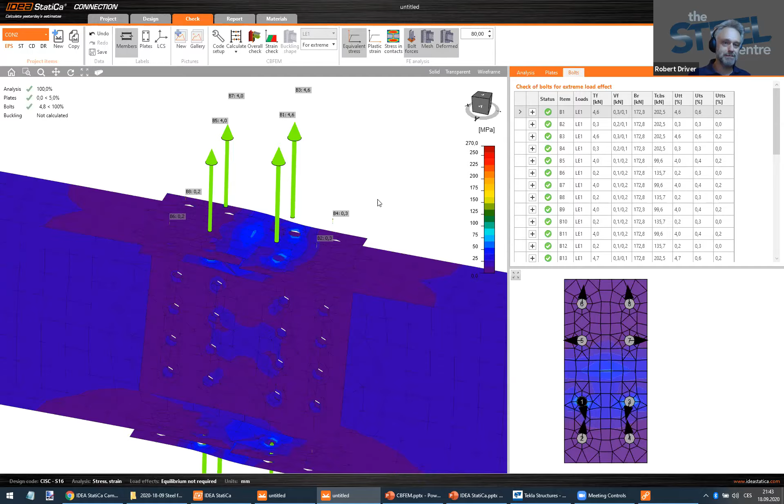And now it's almost 10 in the evening, I think, for you. Yes. So thank you for that. And I did notice that we have a participant here from as far away as Serbia.

So I think the whole... oh cool, a former student at the University of Alberta, so he's kept in touch, which is fantastic. So maybe the Steel for Lunch is becoming more widely known now.